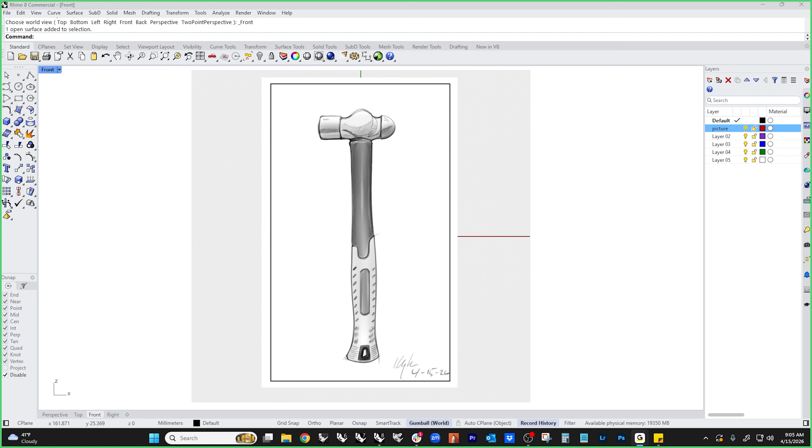So with that out of the way, let's get started. We're going to build this ball peen hammer today. I'm a tool nerd, I like to restore old cars, and have a little workshop here and do all that kind of stuff. This ball peen hammer is one that I have in my collection, and I really like it for some reason. There's just some hammers that feel good in your hand and some don't. I'll use one for a while, and if I don't like it, I'll usually just give it away or donate it to a tool library or something like that. But this one is a keeper, and I've had it in my collection for quite some time.

So the interesting thing about it is the head on this thing has actually a lot going on, and I have it sitting here on my desk. You can't see it, but as I turn this thing around, it's actually got a bunch of different shapes that are kind of pulled together in order to make this thing happen. I thought it was actually kind of an interesting shape to talk about.

So the way that we'll do this, let's go into a little chalk talk here. If we take a peek at this and think about what we're going to do and how we're going to do this, the main shape here...

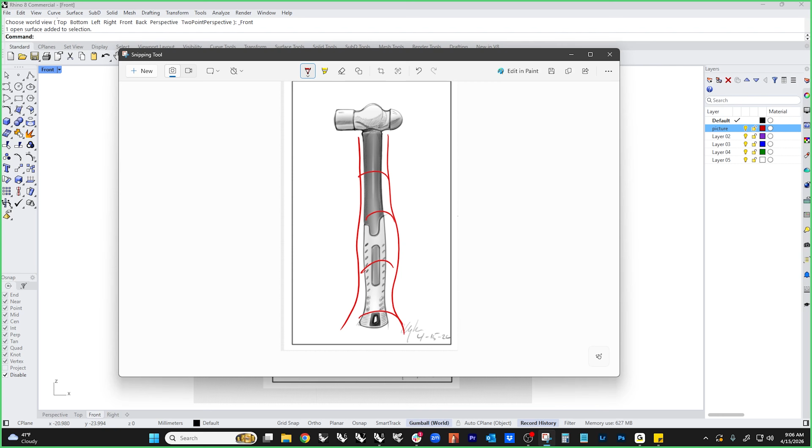...is essentially just a NURBS surface, right? We're going to create some profile curves. We'll talk about proxy objects and how to get things with continuity over the center line. But basically, we're going to make a couple of profile curves, and we're going to get 99% of this just with a couple of curves and a couple of blend surfaces. This up here, that's a primitive object. This back here, that's a revolved object.

This is where the fun begins, and there's a couple of shapes in here. There's one shape that kind of goes like this, and it actually, if we look at this in perspective, kind of goes like this. It's almost kind of like a bladed shape, and it has a section kind of like that. Then there's a secondary section in here, a secondary shape, which is kind of this guy. That kind of lives on top of this thing, slightly offset like this, and has a section kind of like that, right? These two things have to kind of work together and blend together.

And then there's all sorts of little blendy fun that we're going to have in here, and we'll see how that works out. We'll burn that bridge when we get to it, so that's kind of the strategy. This kind of stuff is easy - just projected curves and a little push-pull. All that stuff is kind of easy, so we'll blow through that quickly, but that's in a nutshell, very simply how we're just going to come over here and do this, that, and the other thing. And then done, right?

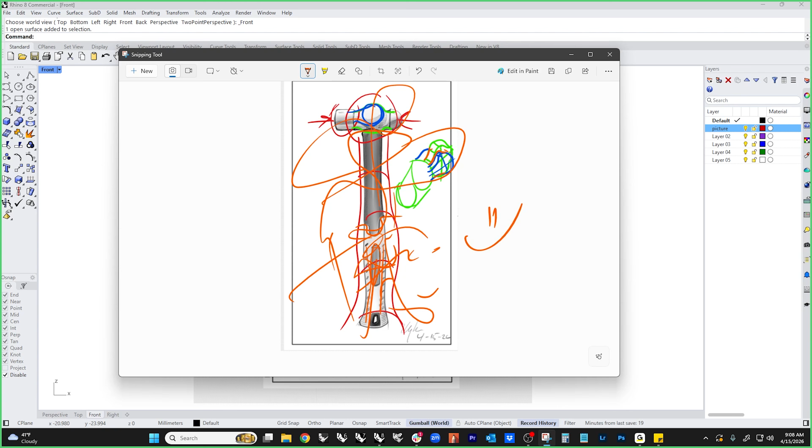So let's go ahead and get started. Anytime I do a video like this, I always start with an image of some sort, and in this case, this is no different. The way that we get that in is we just run the picture command, find our picture, and drag it into the scene, and we can do whatever we want with that. Since I've already got one here and already got it on a layer, I'm going to skip that step.

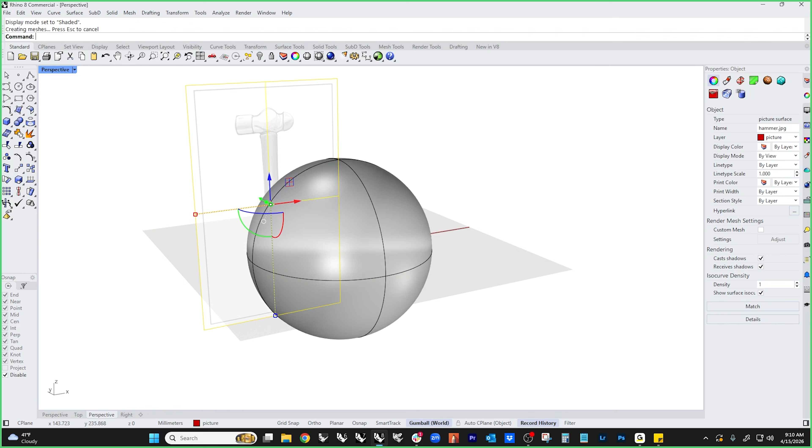In the materials tab here, if I pick this, you'll see that we have a material assigned to this. This is the picture, and you can see that it's a picture type of image right here. We're just going to crank the transparency up a little bit, and that's going to fade that out so that we can work over it. The other thing I want you to notice is I actually have this stuck back in space a little bit. The reason for that is if I were to model something at the center line, which is where we're going to be, and you go into shaded mode, if the image is in there, you can't see it. So I typically stick it back in space so that I can see it as I'm rotating around, but in front view, it's still oriented and all that kind of stuff. All right, that makes sense.

So I'm going to lock this so now it's not selectable, and we'll just jump in and get rolling. The first thing, the easiest get here, is let's just draw some curves. I'm going to come in here and approximate where all that stuff is going to go. Now, I could have machine gunned points down here and gotten this really close, but I don't want to do that.

I want to follow rule of three. If you don't know what rule of three is, there's a video there, and I always talk about it. Rule of three essentially is it only takes 3 points to make a transition, right? If we have 2 points, we can't make a transition because there's no points in the middle. If we insert a control point into the middle here, now we have 3 points. Guess what? Now we can go up or down. In this case, that's a polyline, but if we look at this now, I can make a transition - I can go up or down. And if I want to make an S shape, then I need 1, 2, 3, 4. Now, the interesting thing about this curve, even though it only has 4 points, it still follows rule of three, because 1, 2, 3 - these points make up this transition, and 1, 2, 3 - these points make up this transition.

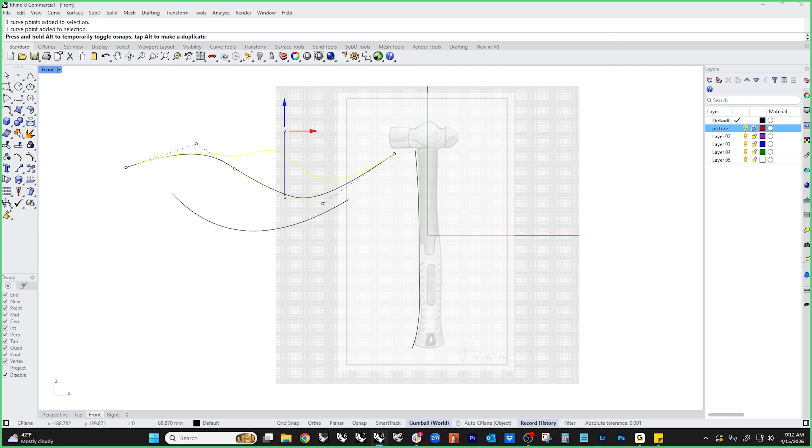This leads into a much longer discussion about continuity, but I want to give you the TLDR. So now I've got 1, 2, 3 that makes up this transition, and I've got 1, 2, 3 that makes up this transition, and those can function independently from each other more or less. Now there's a second set of 1, 2, 3 right here which is shared between these, which is the blend between these two, and this 1, 2, 3 now controls either the blend between the 1, 2, 3 on the left and the 1, 2, 3 on the right, or the transition between the two of those, depending on how they share.

So the concept here is we don't want to do curves like this. I see beginners do this all the time, and you end up with a surface that looks like that. Then you go down the road and say, why are my fillets weird, why is it hard to model, why is it hard to edit, why is everything hard? It doesn't have to be.

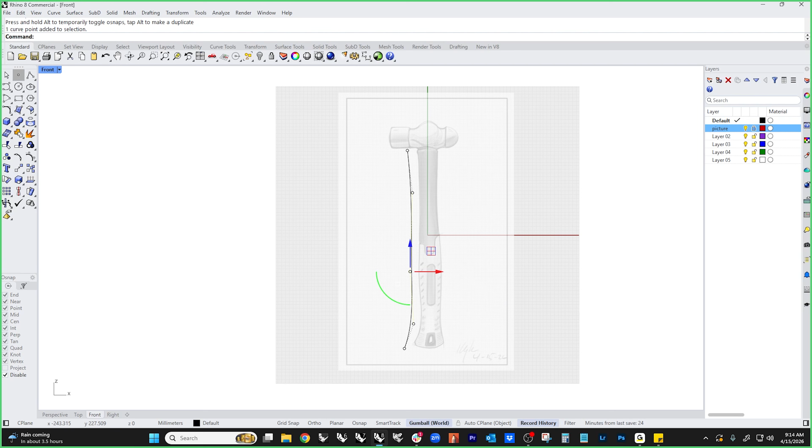If you look at this shape, it's got a high point, a low point, and a high point. 1, 2, 3, boom, right there. Then it transitions from this high point back to a low point, back to a high point, which means I have to have a point at the high point, a point at the low point, and a point at the high point again. 1, 2, 3. Once you understand this, this is the very basic building block of NURBS modeling and sub-D as well, because sub-D follows the same rule.

So if we're going to make a corner, we have an anchor point, 1, 2, 3, anchor point. This is our transition right here. If we want it tighter, we move these closer. If we want it looser, we move these farther apart. This is the exact same rule with sub-D.

If we look at sub-D—I don't think we're going to do any sub-D on this end unless things get really wild—but sub-D follows the exact same rule. If we turn the points on for sub-D, look what we've got: anchor, anchor, 1, 2, 3. If I grab these edges and move them closer, what happens to that corner? If I grab these edges and move them apart, what happens?

Okay, so that's all you need in order to make a shape. And so now you start looking at things differently, and you start saying, okay, where are the transitions? Where are the inflections happening?

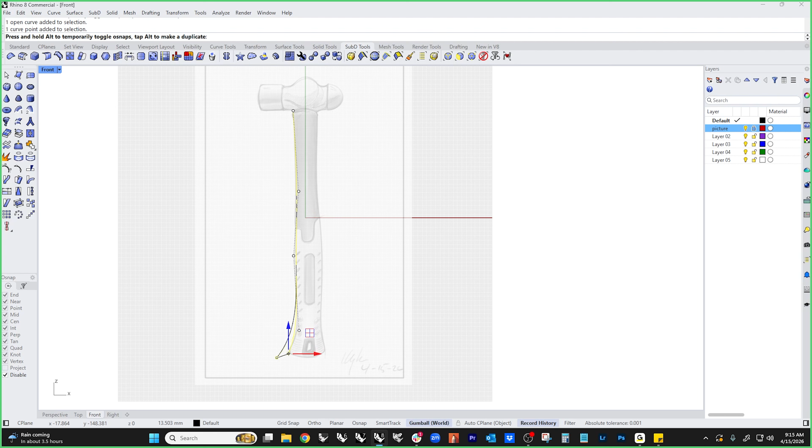In this case, we have a point here. We have a point that's going to land somewhere in there. We have a point that's going to land somewhere up there. We have another one that's going to pull in like that. And then we've got one that's going to land there. That gives us everything we need. Now we might fuss this a little bit, just with our nudge keys—we may pull this out just a hair and do some adjusting—but that is the bones of our curve. We don't need any more than that.

The only time we would need more than this is if there's a sub-transition somewhere in this curve that we missed. By a sub-transition, I mean if we had an out, in, out, but we missed it and there actually is a second transition somewhere down in here, then we would just need to add another control point to get this secondary transition which lives down here. So if this curve changed shape or changed speed on us—there's a million ways to refer to that—if the shape changed so there was a sub-transition somewhere in there, you'd need an extra point in order to get the 1, 2, 3 to make that.

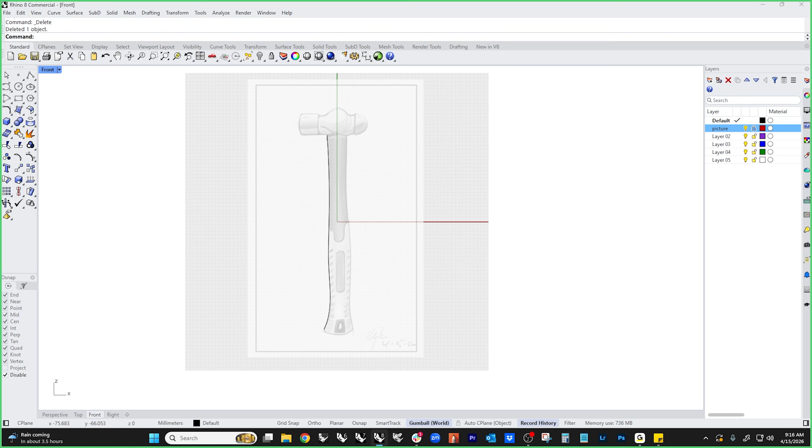Okay, now because we're going to blend over this, I'm going to just take this curve and mirror it.

The reason I'm going to do that is because now all my points match, and this is going to be a lot easier to get a blend that behaves itself the way I want it to. I don't want crazy isoparams crossing each other, or a whole mess of stuff to deal with. So I'm just going to do something like this.

Now for reference, I'm going to just draw a straight line across the bottom of this. I'm going to change degree from 1 to 3, and that's going to give me a degree 3 curve with 4 points, which is super easy to edit. I can just change that to get my shape there. So that's the bones of how we're going to build this handle.

Now we're just going to grab gumball and extrude those back, and you'll see that we get really nice, clean, in this case single span surfaces, which is really nice.

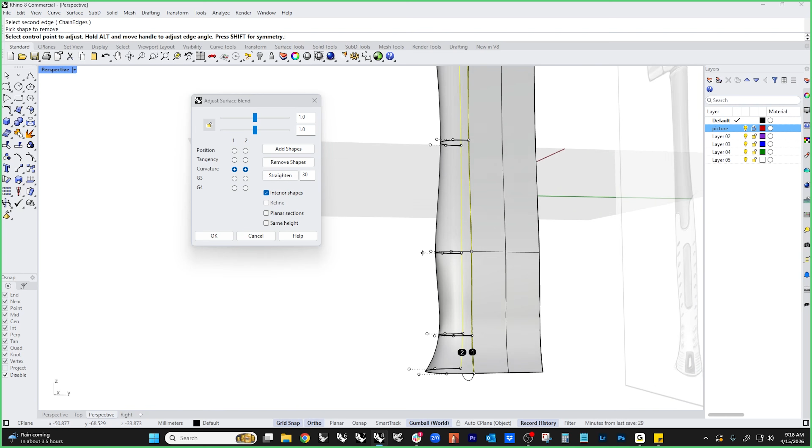So now I go and grab my blend tool, which lives in here, I keep using my pop-up. I'm going to show you where it is. It lives in here. And we're going to blend from here to here.

You can see that we get a really gorgeous transitional surface. We don't even need it to be curvature. We're just going to do that, and say this is going to be the same height. And then we're going to lock these handles and adjust our shape here. Check that out.

Anytime you need to build a shape like this, a grip for anything, a grip for a drill, a grip for a ski pole, any type of handle for anything, this is one of my favorite go-to techniques for being able to do this.

The thing that I like best about it is it's super easy to control your shape. You know it's going to be tangent across the center line, so you're not going to have any fins or butts at the center line.

And the surfaces that you end up with, we can delete these now, are wonderful, right? That is a really nice shape.

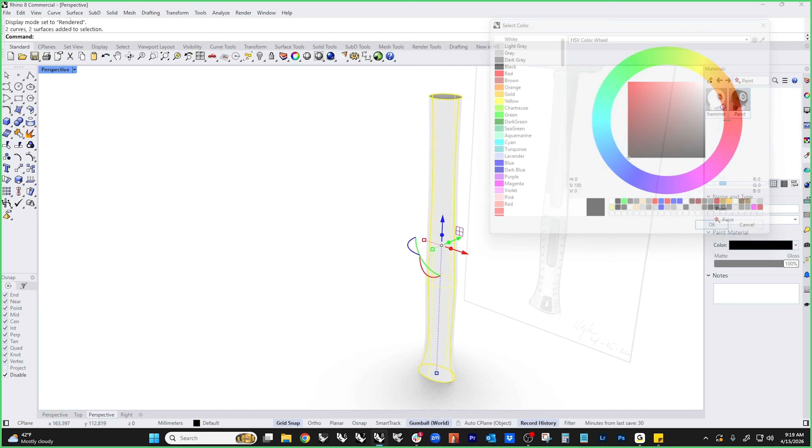And if we change that to rendered mode and throw a material on this, so you can see what it looks like. You can see that we get really nice geometry there.

Okay, so that's the heavy lifting for most of our handle. There is a secondary thing that's going on down here because of the way that this is shaped.

We can actually probably get that shape a couple of different ways, and I was going to see if we could cheat and pull the points, but I don't want to increase the density of that.

So let's do a loft, and we're going to loft from here to here to here, and let's let that do that, and see if a couple of our options get us something a little nicer.

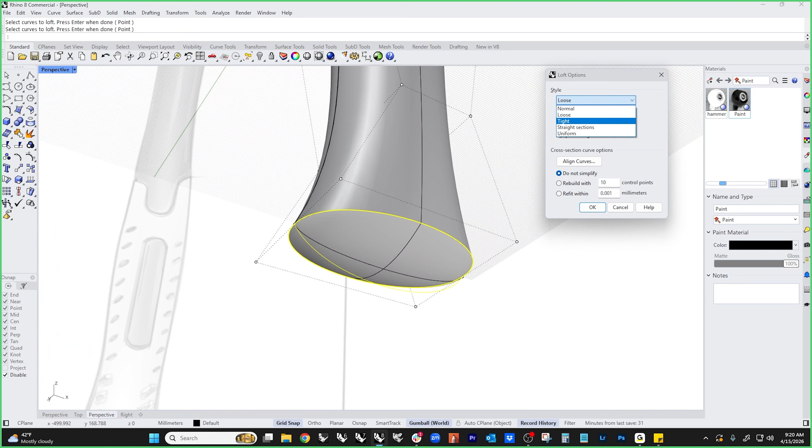Something like that, but I don't like this shape side to side. But I'm going to say okay, because this is going to give me what I need to get there.

And in this case, all I need to do is grab these points here and this point here, and scale these together a little bit, and look what happens. See how that changes shape? And that gives me a really nice cap over the end of that thing.

Now, the one that I have here, I think this is a product of a bad drawing instead of actually the shape of the bottom of this hammer, because the one that I'm looking at on my desk is actually fairly flat. So I'm actually going to cheat. I'm going to scale this up just a little bit and flatten that out.

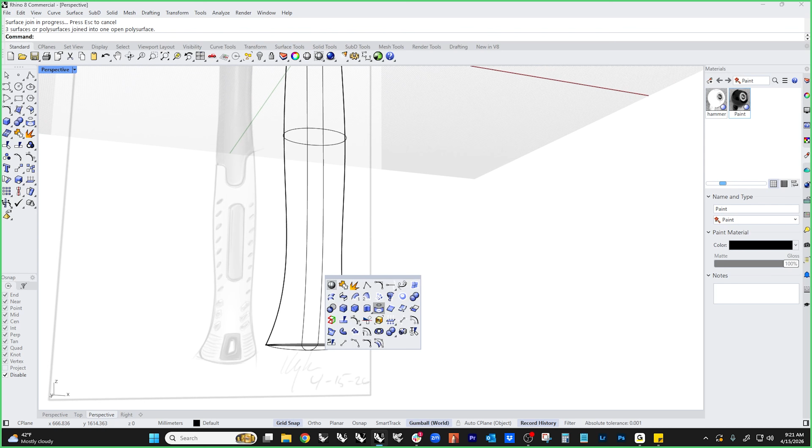I think I'm going to let the model dictate reality instead of making the model follow the drawing. It's always important to reality check yourself and make sure your stuff always makes sense. So that's closed up at the bottom now, and then we can add a fillet or a blend on that, but I don't want to get ahead of myself at this point.

Now up here, we've got a little bit different shape. This thing has an oval shaped recess, a part that sticks up. The hammerhead kind of sits down on this on a flat. Actually, it's kind of tapered.

I think I'm going to cap this, and then do some gumball tricks with Control-Shift-Select. I'll extrude up another little puck here, then Shift-Drag-Scale to bring it in, and bring it down just a little bit. Got grid snap on it, I don't want that, to give me a little thing like that. Then I'll extrude this up again, and we get this transition for free here, so I can blend and get that.

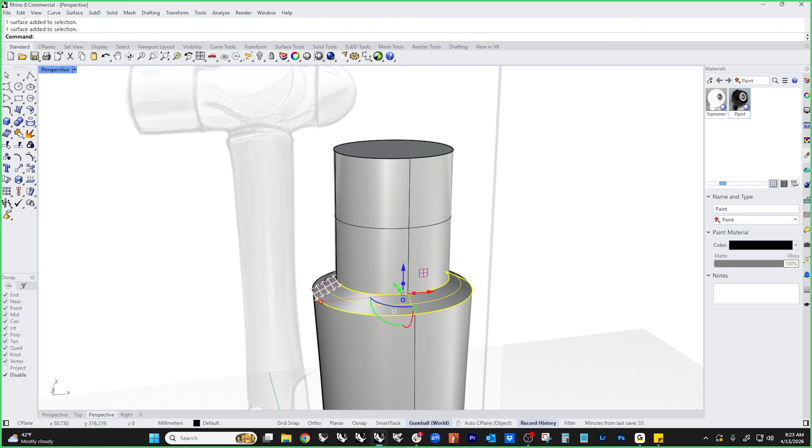Or I can delete this and use a blend surface to get a little blend, which is actually one of my favorite tricks, so let's do that. Let's delete that, move this up a little farther - can always change it later - and then run BlendSrf and chain it. That gives us blends on either side.

Now this one is actually fairly sharp, so I'm going to sharpen it by moving that closer to 0. You can override this, by the way - the dialog box stops at 0.25, but you can actually override that and make it sharper. It still has a little teeny transition on there, but less than before. Let's take this one and push it down like that. That's a lot easier than using blend surfaces and all that kind of stuff.

Can we dimension the set, since I say I want the handle to be 300 millimeters, for example?

I'm glad you mentioned that - I actually did scale this to be somewhere in the 300 millimeter range. So when you scale the drawing, typically I'll make a 300 millimeter line, and then scale the drawing somewhere in there to match that. I get flamed all the time for not measuring my drawing, so I actually measured this one. I've done entire demos where I finish and then find out the thing is like 17 feet tall or an inch and a half long. When it's just a demo that's never going to get made, I don't worry about that, but in this case I actually did.

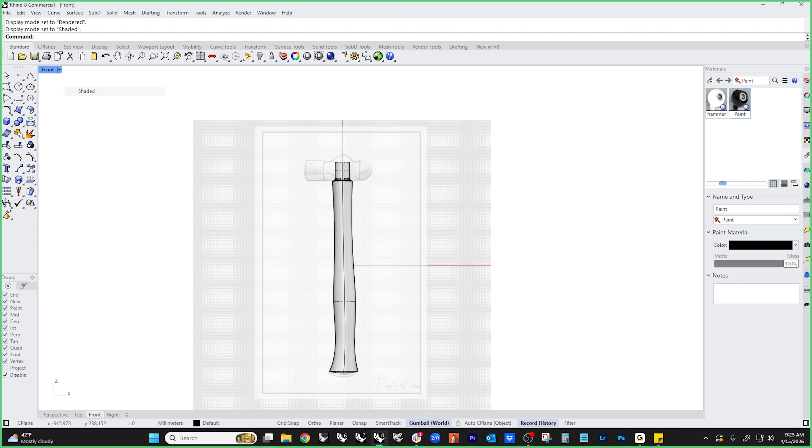So let's take a look at wireframe, and then go ahead and finish up our details here and get our handle done. I'm procrastinating getting to the hammer because I know how to do this stuff, and I haven't quite figured out how to do the head yet.

So let's follow our 1, 2, 3 rules. In this case, we're probably going to do this. And that gives us our structure, and now we just need to adjust our shapes a little bit. Once you start following that 1, 2, 3 rule, all of your curve creation woes are going to start fading away, because the stuff is just going to make sense to you as far as what your shapes are doing and what you want them to do. You won't end up with these crazy inflections in your surface that you don't know where they came from, because you'll be able to see exactly where they came from.

If I had 6 points in here, the surface is going to go all over the place, right? You don't want that. In this case, I know where this corner is coming from, so if I need to adjust it and make it softer or sharper, I know which points make that shape up. I think I want this to come over a little bit more, like that.

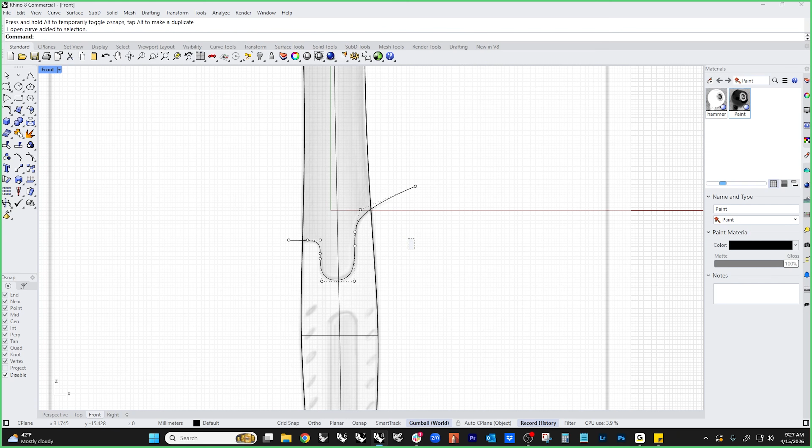There's a couple of ways we can do shapes like this, and let's give this a shot. So let's copy paste this, and turn the points on for this one, and point edit our offset in. Now you may be asking, why didn't I just use offset?

Well, because offset can actually - let's use offset and I'll show you about that. If we go into offset and I were to offset this thing 2 millimeters, or actually let's do 1 millimeter like that, and I don't want to cap it... let's do something like that.

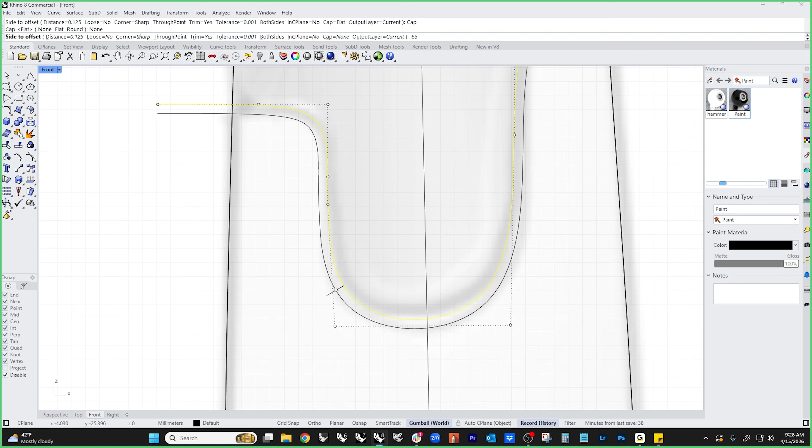That probably works. And I look at this curve. Bleh, that's exactly the opposite of what I want, right?

So let's run offset again, but let's use the loose option. What that does is it takes the points and moves them normal to the old curve. Now, this is less accurate than the typical offset, but it's a lot nicer from a curve point of view, so I actually like that personally.

So let's project this through, and we can hide this. And now we've got the shape.

Now, if the world is kind, we can use push-pull, and we can push-pull this in a little bit. Now, in version 8, I would have been able to get both sides of this, and that worked out all right. But in version 9, I'll be able to select both sides of that and just push that in. But that actually worked out quite well. And we can put a little fillet on that if we want to later, but I'm not going to worry too much about it right this minute.

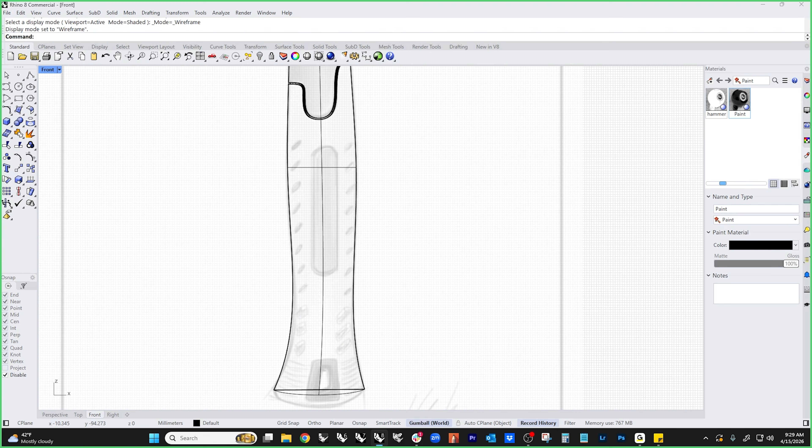All right, so let's look at the rest of our details in here. And we'll do, let's see, do we want rounded rectangles or do we want ellipses? What does this thing look like? Looks like ellipses, we'll go with that.

I'm going to use a 2-point ellipse and just go like that and like that. And then I will, let's draw a curve, like that, vaguely resembling our other curve.

And then we'll array this down the curve. So we'll do a transform, array, along curve. That's the object, that's the curve. We want, how many do we want? 1, 2, 3, 4, 5, 6, 7, 8, 9 of those.

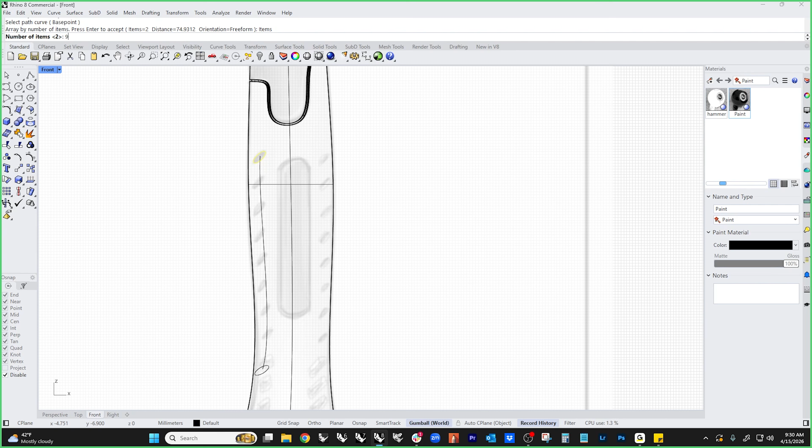Something like that, and that's obviously more precise than our original drawing was. So I'm going to take it and I'm going to cheat this one just over a hair, like that. Let's mirror this and see how close we get. It's just easier than drawing it again.

Shapes aren't exactly right, but let's see what we can do. Just rotate this a little bit. I think I'm going to call that good enough for demo work.

And then our rounded rectangle in the center. And I'm going to take this and I'm going to move it between these two items. Let's see, let's pick one, so we'll move it between these two.

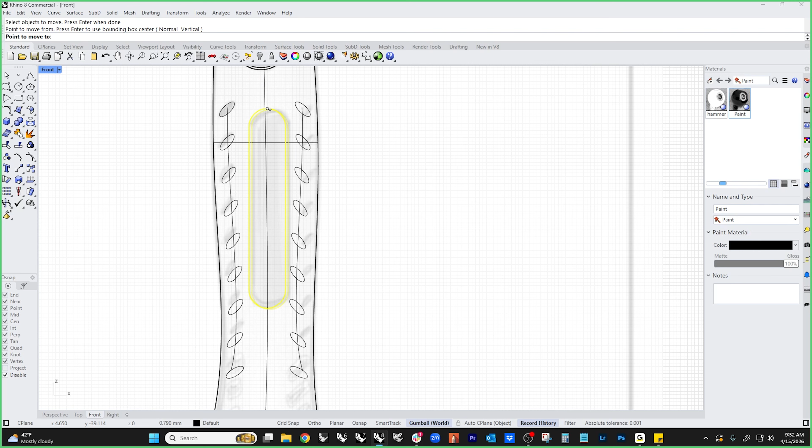So if we say move, that's our object to move, and then we're going to do that. And the point to move from is going to be the center of this guy. So there, and then we're going to use the B switch, so we're going to hit B enter, which says we're going to move between here and here. And so I know that this is dead centered.

And so now I just need to move it down a little bit. And in this case, there is an offset in here, so I'm going to copy paste. And I'm going to just shift scale this in a little bit. Or I could use offset with the loose. Let's do that. That worked all right, so let's do that.

Offset. Could you mirror the ellipses? Could you mirror and the ellipses would be inverted directly?

Yes, if my shapes were exactly, if the left side of the hammer and the right side of the hammer were identical, but they're not. So when I mirrored it, they didn't quite match up. So we're using the loose option, and we're just going to pump that in, and then we can just double check and make sure that our curves aren't crazy.

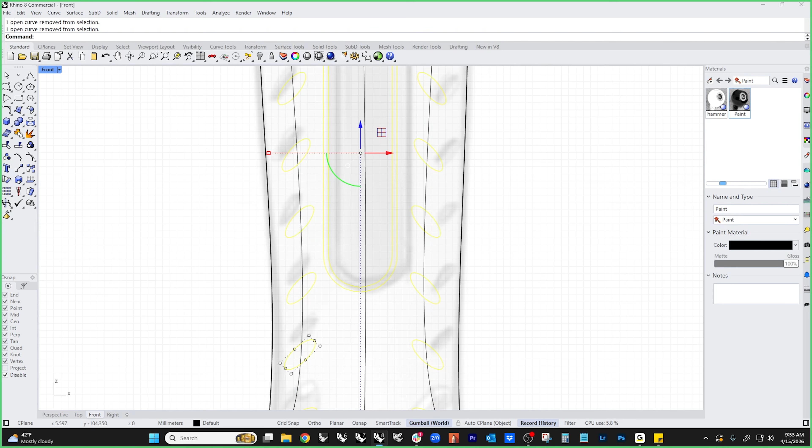So this, I'm going to take these all, not these, and I'm going to project those on. And then we can use push-pull, drop that in.

Now, the nice thing about push-pull, if I just pull this in and I don't click again and just hit enter, it's going to know it's going to go in, but it's going to remember the distance from the last one. So this one and this one now match.

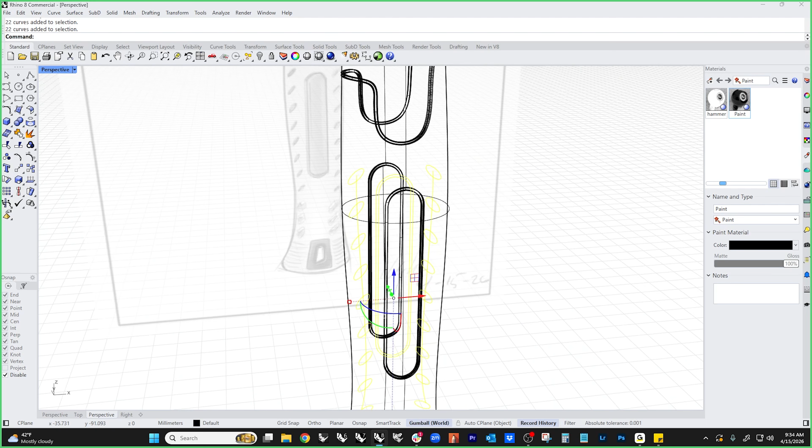And then for these guys, these are actually through holes. And so I think what I'm going to do actually is I'm going to retool my thought here and get rid of these, keep these. And instead of using push-pull for those, let's grab all of those. Those, not those.

Let's just use gumball cut, I like this one. So what we can do is grab this, use the little slash here, and it should just rip right through there.

If you didn't know what all those other little buttons on the gumball do, there's some cool stuff in there. So let's take a look at what we've got. This is actually starting to look really good.

And if we want to procrastinate further, we can dig into this handle a little bit and do the blending. Where are we? 935. Okay, I think that gives me enough time to procrastinate.

I saw a really funny quote about procrastination the other day. It said, 'I'm not procrastinating, I'm just waiting for panic to focus my efforts.' I thought, wow, I feel seen.

All right, so let's blend this. And how did you do the holes? Yes, let's talk about that again.

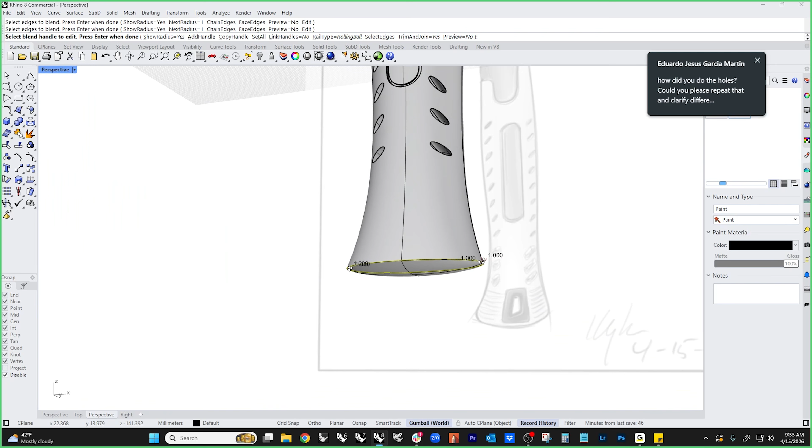So let's undo that. We've got an object, we've got curves. We want these curves to make holes in this object. We're going to grab this little slash on gumball. This is a cut. If you hover over it, there's a little cheat sheet that pops up. Click and hold, drag it through the model, or hold down shift and it'll go both directions, then let go, and it does a wire cut right through the part.

Cool? All right, let's do some blending down here.

Now, filleting is one of the things in Rhino that is much maligned, and it earns some of that, some of it doesn't, and I'm going to show you some tricks to get around it. One of the first things you can see right here is this is going to fail because the fillets are red. So if I run this, that means there's something going on right in here that is going to make that fail.

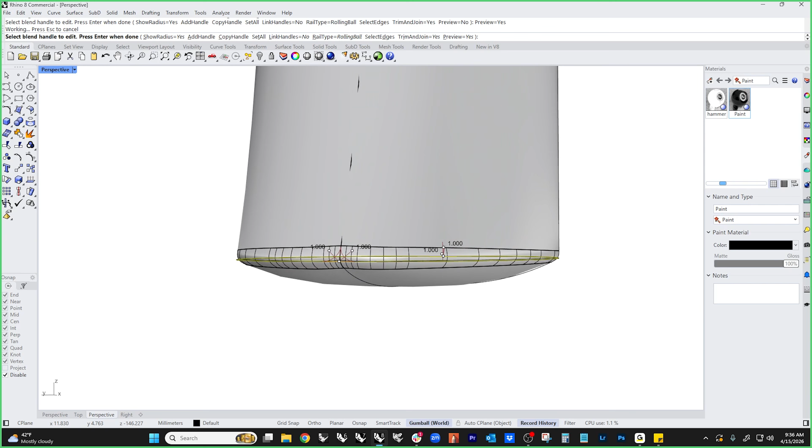And if we preview it, you can see what happens. It chokes right around the center line. So let's not even worry about that.

Let's do this. I'm going to extract that surface, and I'm going to draw a box, and I use a box just because I'm lazy. Keeps me from having to draw two lines. And let's just trim a hole here.

And you can see maybe where our problem lies. Our problem lies right in this area right here. See how that's misbehaving? Let's figure out what's going on there.

So let's undo that. And we might be able to get away with having our fillet behave if we fix what's going on here. So let's look at the points and figure out what's going on. Now, what's going on is you can see exactly what's going on here.

See how the points are doing this right here? So this surface is a little bit kind of undefined for probably what it needs to be. And so maybe if we change degree on this from 3 to 4, we can get a little clearer picture of what's going on.

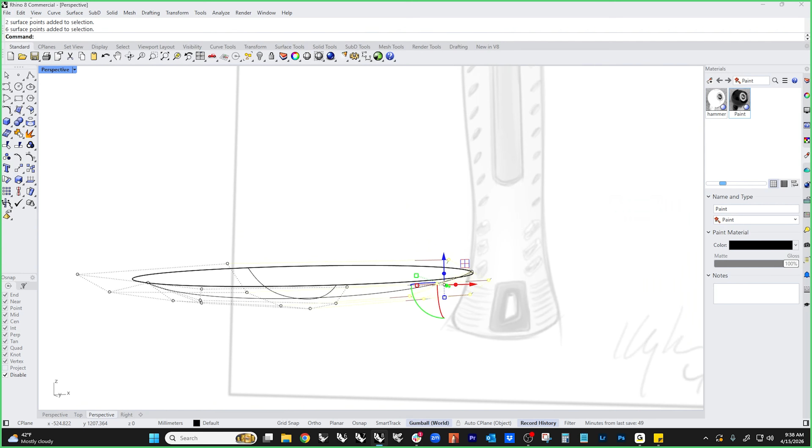And it might be as simple as if we take this row and scale it flat like that. So we've got tangency there, and then we take this row, double click the control. I'm moving the gumball to where I want it to scale to, and then scaling that to 0, and that will smash that flat. Now I've got a tangency situation going on the end of that, and it gets rid of that little discontinuity that was happening there.

Let's see if that makes any difference when we run a blend around here. It may not, let's see. So it actually does a much nicer blend around there.

But I think I want to take this one step further. I mean, we can run it and let's see what it did. It actually did an okay job.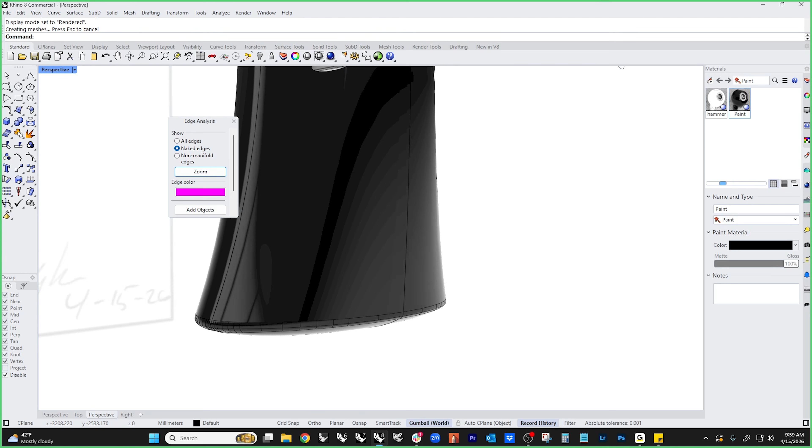Maybe we call that done. I'm going to call that done. If you want to dig into this further and you wanted a more complicated blend, it's just a matter of modeling a gap.

Can we get an explanation on Grasshopper? Not from me. You're gonna need somebody a lot smarter than me, like Jaffe or Brian James or Steve Fuchs. I'm not a Grasshopper guy.

So if you wanted to dig into this deeper, you can look at the structure of this and say there is a surface there, there is an edge there, there is an edge there. If I wanted this fillet to do something differently than it's doing, all I would have to do is change the shape of these edges in a way that makes my shape do what I want it to do.

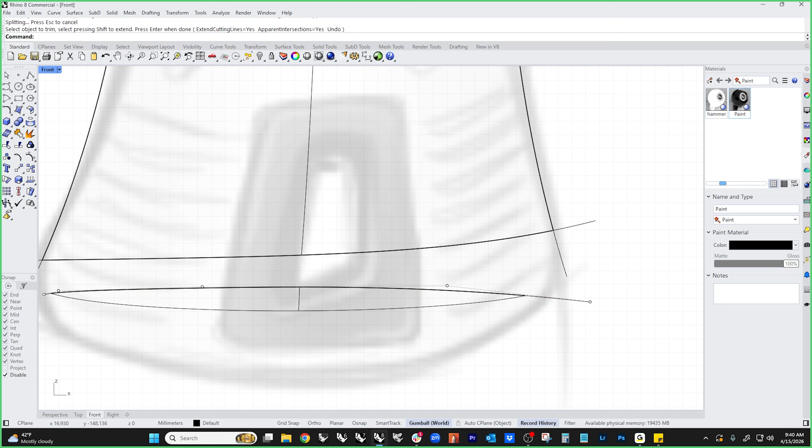Now, I've got two parts of the structure I had before. I just am missing the middle part. Well, the easiest way to put the middle part back in is just to grab blend surf. Let's do chain.

Now we've got control of this, how the tangency goes together. I can even change the shape internally on that. I can go to curvature, not for product design—some people get bent about that, but tangency, for my money, is about as far as product design is ever going to go. So now we've got a different shape going on there. Could you have gotten that with fillet? Maybe, if you'd add handles or something like that, that's fine. But I like being able to define that stuff myself.

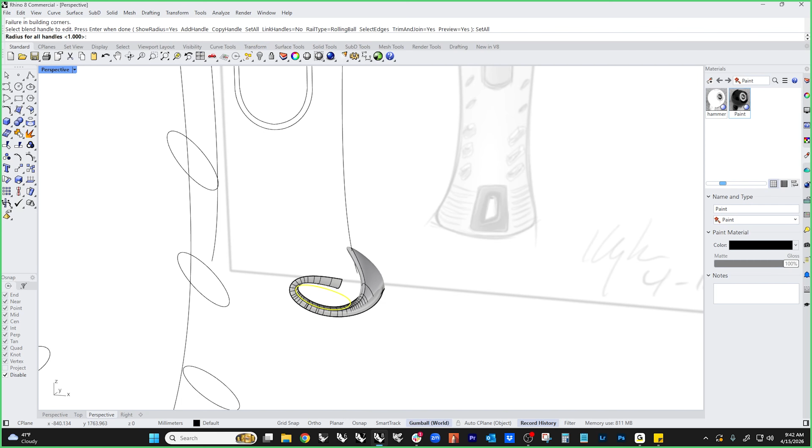So let's go in and do some itty bitty teeny tiny little fillets in here, and we're going to set all of these to like 0.25. Looks like that's still self-intersecting, so let's make it even smaller. That looks like it's getting close. That looks like it's completing without any drama, so let's call that good. And then we'll do the rest of these as well. I like to test it on one to make sure it's going to do what I want, and then roll it out for the rest of the crew.

Otherwise, you get to wait while it calculates all of them and then find out it failed, and then you change it. It has to calculate for all of them again, and then you find out it failed—it's annoying. So these little fillets are the things in product design that kind of make or break the model when you're doing renderings. And there is an edge softening tool you can use if you don't want to model all of this stuff just in the render mesh. If you hit F1 and search the help for edge softening in Rhino, there's a whole thing on how to use that.

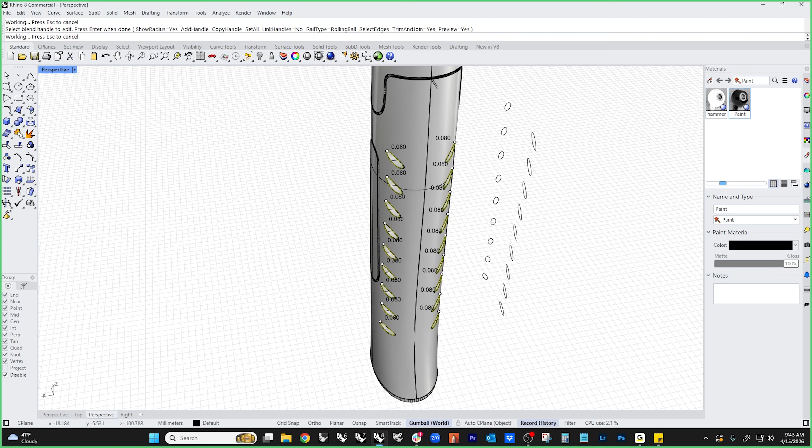And we still got a closed poly surface. It's a good idea to keep an eye on that, to make sure that as you do this stuff you're not interjecting some kind of wonk into your model.

That's not super awesome right there, but I'm going to let it roll. There's a little peak right there that's not cool, but it's probably a product of the offset. If I was going to do this, I'd probably print it, take a look and see what it looked like, but if it was going to be too disruptive, I would go in and fix that.

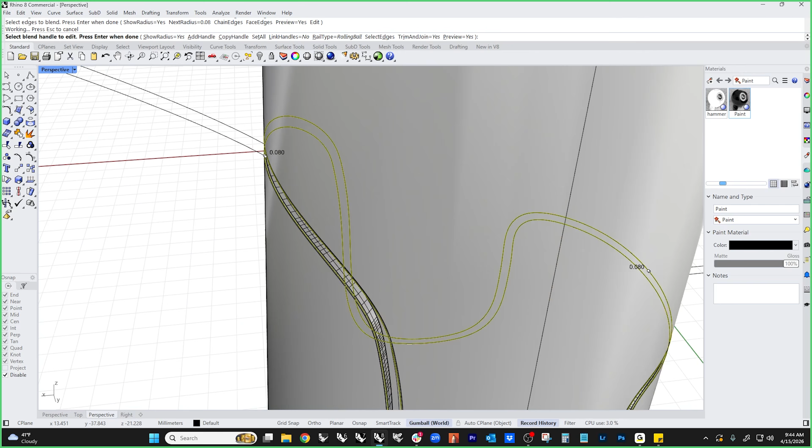That 0.08 fillet seems to kind of do what I want it to do, so we just want to crack those edges off. All right, and I think that gives us our completed handle.

So let's make a new material, and we'll make that kind of a gray. And we'll do this part gray.

And yeah, all the rest of the stuff looks right. Let's change the properties on this a little bit—let's make this a little matte, and let's make that a little less clear. Actually, let's change this paint to a plastic.

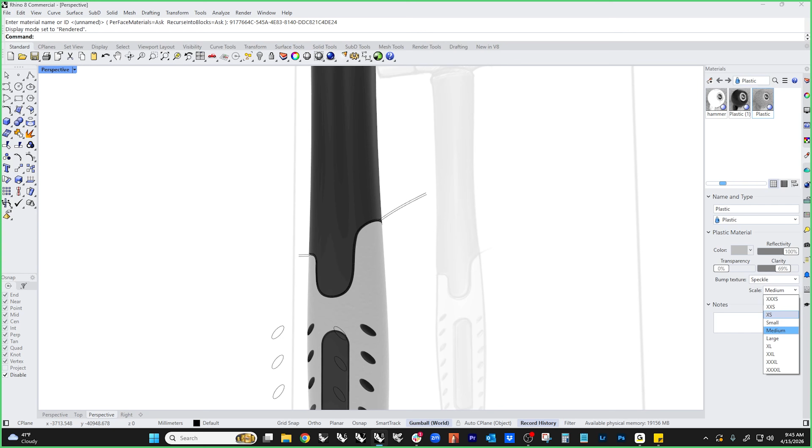And that way, the nice thing about the plastics is they even have a bump texture in here. So if we wanted to put a texture on that—let's see, didn't want it on that one, wanted it on this one. So now that's got a little bit of a texture to it.

And fun fact, if you take this and change it from a plastic to a physically based material, and look in the bump channel, you can see the default value for the speckle texture is 50%. If you raise that, you get more specklies. But you have to switch it to physically based in order to get that setting. All right, let's save and call that good.

This is my redemption song, so we're going to call it Hammer Doesn't Suck Yet.

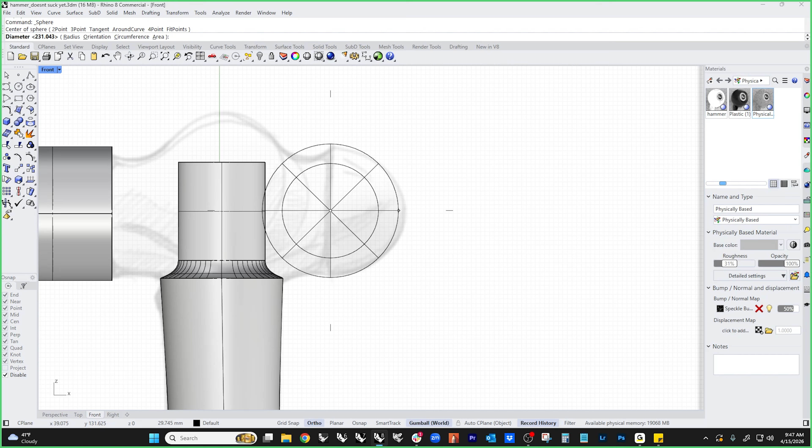Let's dig into the head of this thing. So we've got two very easy to model shapes. Let's grab the easiest one, which is this, and we're just going to make this like that—direction constraint is none, so we're going to pull it in that direction and go there. Let's shade it so we can see what's going on. And then this guy, I'm going to call this a half a sphere, so let's just do that. And it's actually slightly oblong, and there's a seam here that I don't want to be part of my model, so I'm going to rotate this 180.

Because what I want to do is actually trim this just past the center line. And then what that does is that gives me a surface that is now seam free, and I don't have to worry about what to do with it.

So let's get into the shapes on this. So we have a shape that starts like this, 2, 3, comes over here, 2, 3, like that. And we just have to make these points work a little harder. It's always better to pull the points farther and make the points work harder than it is to add more points.

Ideally, we want these guys to do as much lifting as they possibly can without adding additional complexity. Now, I've got a curve already, and that looks great. I'm going to just mirror this because I'm lazy. And it gives me most of the stuff I want already. I just need to change its frequency a little bit with scale. And that gives me pretty much what I'm looking for.

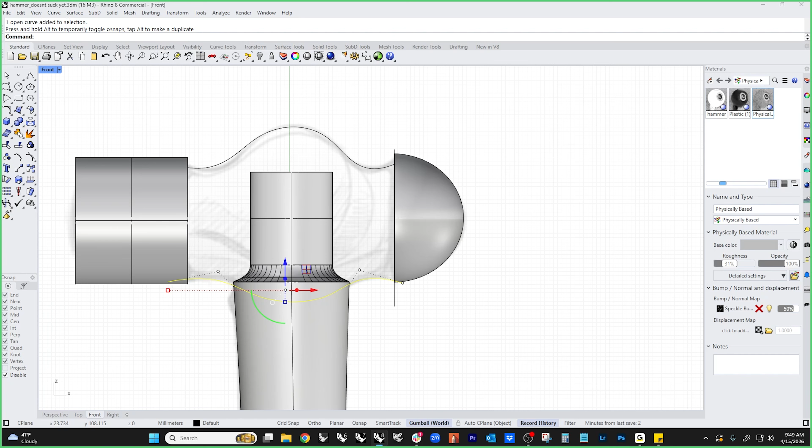So the efficiencies here, we want to work as smart as we can. And anytime that you have a situation where your points are matching from here to here, it's going to make it easier to surface stuff because we can just do things like this. It's simple, really.

Now, the cool thing about this is we've got a nice point structure so that when we want to start changing the shape on this a little bit, if we pull this out like this, the center of this thing actually has an inflection in it that allows this to bend around like that.

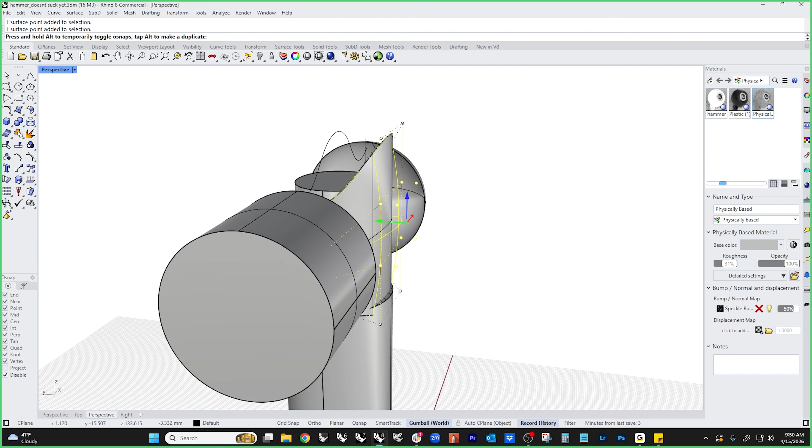And that gives me the understanding and the control to be able to manipulate this surface to do what I want. So I can look at the shapes, I can look at the highlights, I can read what this thing's doing, I understand what's happening, and it all becomes much less mysterious, and you're much less a victim of

Rhino doing whatever it wants and you not having any say in the matter, right? We want to be able to have control over this stuff. That's the key. You want to be the driver, not the passenger of your models.

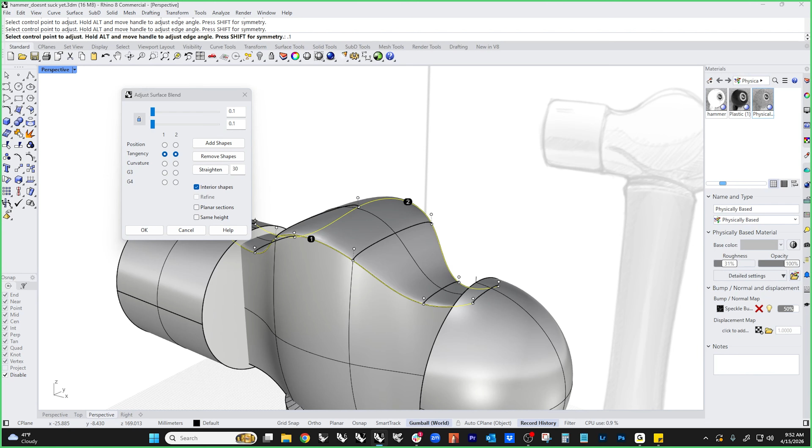All right, so to close this guy up, I'm going to use my favorite trick, which is just blend surf, and I'm going to override this and go 0.1, 0.1, and it makes a lovely little crowned surface with slightly rounded edges, which is what I want.

So let's do the same thing down here. I had somebody joke once that my tutorials weren't so much modeling demos as they were blend surface demos. And I was like, well, I'm not even mad about that because you're not wrong. Because blend surface really is a brilliant tool for doing any of your modeling transitions.

So we've got this main shape here, and that's pretty great. So if we look at this in rendered mode, you can see that we end up with, let's get a metal on this. You can see that we end up with a really nice kind of rounded edge there with almost no work, right?

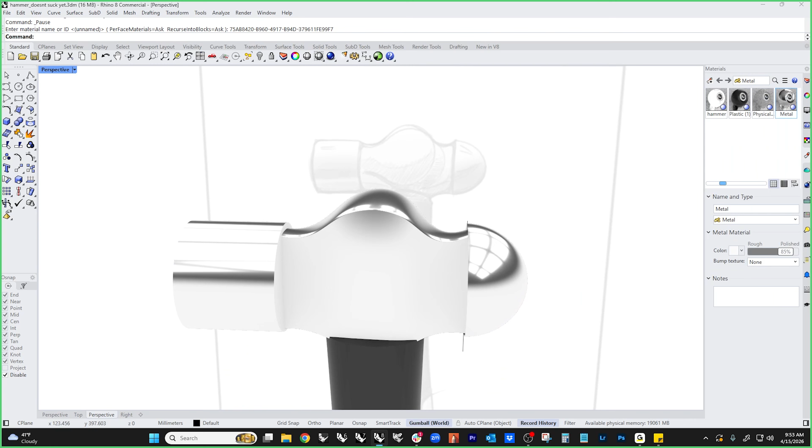We love that. We love great results with little work, right? I think Bill Gates is credited with that whole idea of give a lazy man a job and they'll figure out the simplest way to do it. He's not wrong.

So let's add this secondary shape in here. And the secondary shape, it's interesting. I was looking at this thing, and the secondary shape really, it's not precise. It's not precisely aligned. It's actually kind of weirdly aligned, and the shapes don't really match. And I'm going to split this by point here and here.

And then I'm going to turn my points on. I'm going to change the degree on this because it's a degree 2, and I'm going to make it a degree 3.

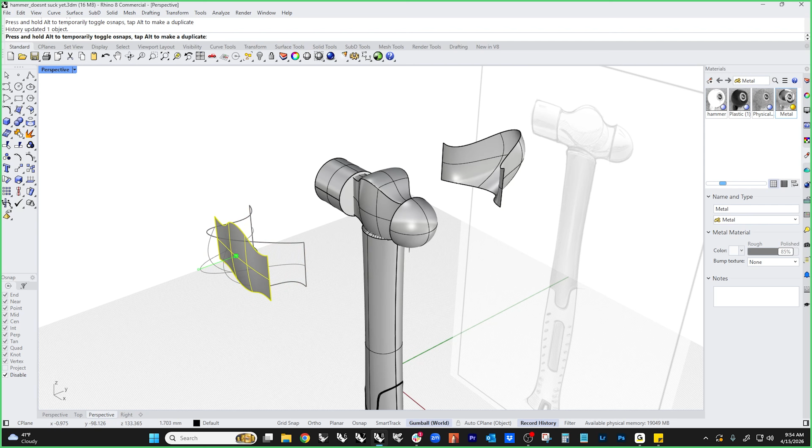So now after mirroring, an edit on the original surface is automatically transferred, yes, if you do it with history. So if you mirror something, if I take this surface and mirror it with history on, and I do something to it, that one will update. And the cool thing about this is... I think that killed history. So let's do this again.

I don't want to do it that far. Let's mirror it like that. So we've got history here, right? Because we had history recording down here. If I take blend, and blend from the original object to the mirrored object, like this, check this out - it all updates.

So I can take that one step further and do this. And as long as I go into the original part and don't mess with anything else in the history chain, because this is the parent, right? So if everything has to come from the parent, check that out - it redoes the tangency.

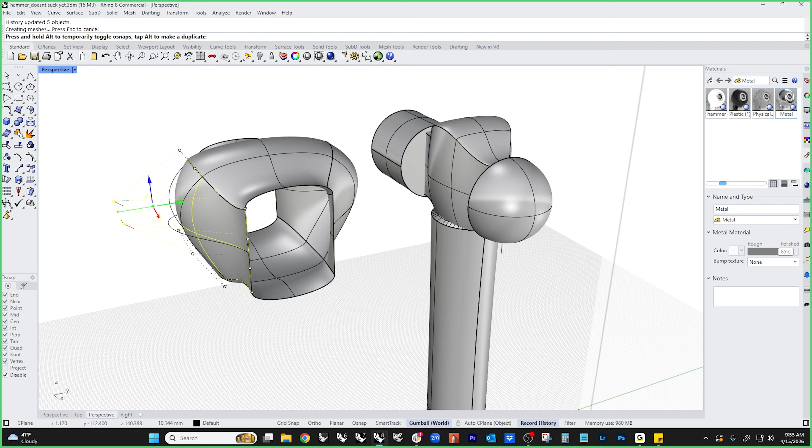Fun stuff. Now, fun fact, blend surf - check this out. If I run blend surf again, there's an edit option in the command line. Select blend to adjust, the two that can be adjusted are highlighted. If I click this one, check out, I can go in and modify the properties of that.

I can even change from tangency to curvature and say okay, run that again. I can do the bottom one now. Go back to the original parent, readjust that, and it all adjusts again.

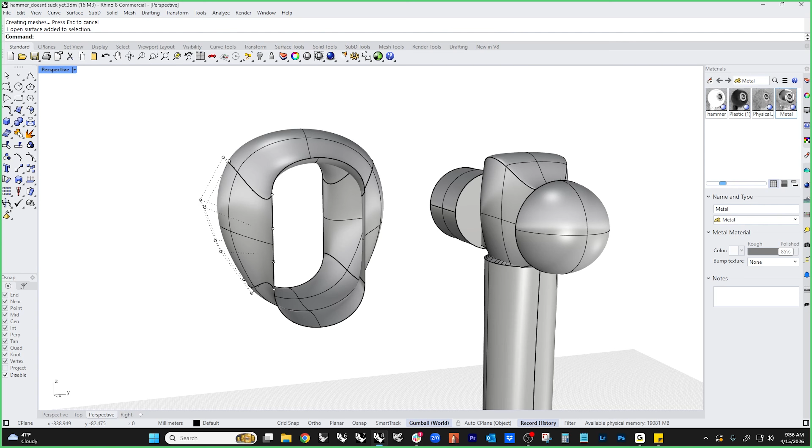So as long as you keep track of who the parent is - and ideally, I've been campaigning for years to have the parent have a different color, but who am I, what do I know about Rhino? Ran a consultancy for 20 years, making a living running Rhino 15 hours a day. As long as you keep track of the parent, you can set up these kind of more interesting history chains and do some cool stuff with it.

Okay, so let's go back to this. We changed degree on this, so we've got more points. So I'm just going to edit these guys here like this, and then I'm going to edit these guys, and then pull these guys a little bit.

And it's funny because I was looking at this shape and I was like, wow, this is a really inelegant shape, it really doesn't relate to anything else. As a designer, I look at it and think these curves need to get finessed. But it's entirely possible that in the world of hammer technology there's a reason why this stuff is set up this way, like to keep the head from shattering when you smash it into something, or to change the resonance, or whatever. Who am I to question it?

So we'll just go with something like this. I'm an art school nerd, I didn't go to engineering school, so I have to take a lot of what people tell me for granted.

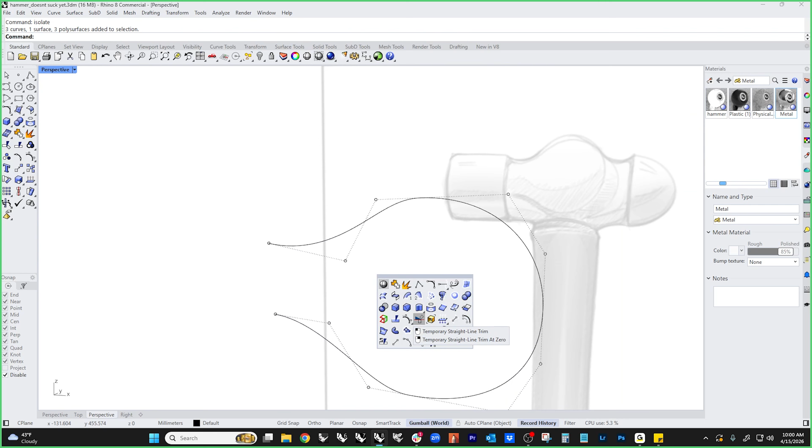So, looks like this guy needs to get tucked a little bit. And so now we've got to figure out how to make a surface out of this, because it's no longer planar, right? It's got all sorts of crazy stuff going on. So let's do something simple, and let's just split this in half. We're going to split it by point, and then we will loft from one side to the other, like that.

Now let's look at the points on this and make sure nothing crazy happened. And it looks like that actually did do some stuff that we don't love right at this edge right here.

So let's do a rebuild on this. It's 4 and 9, so let's just use that, because we don't want to add complexity to it. But let's change it to 3 and 3. And then say okay, and that gives us a better shape.

Now you can see what's going on here though. This shape changed quite a bit, so we might not want that. And in this case we have to decide what's going on with this edge. Is this something that we can live with?

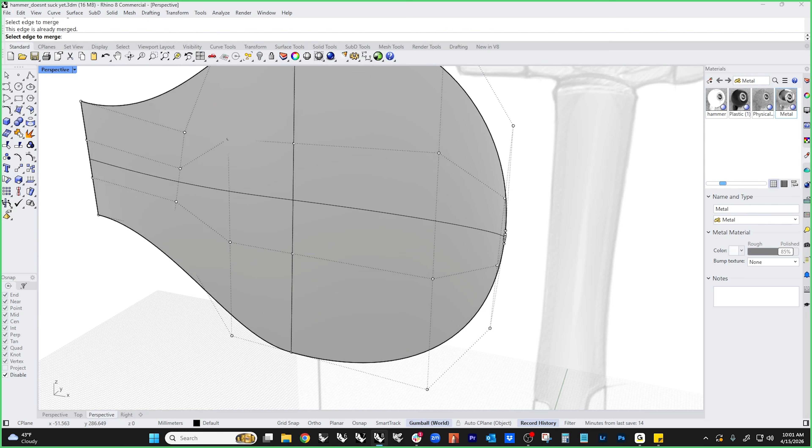Now I'm going to say yes, because chances are we're going to put a fillet on this, which means this edge is actually going to get cut off, and we're going to have an edge that's interior in here that's actually going to do more of what we want it to do. So let's say okay with that.

Now because I want to keep the point structure on this organized in a way that I can keep track of, so I don't want to add a ton of complexity to this surface, but let's add some crown to this.

And then let's pull these points out a little bit so that is shaping the way we want it to shape.

And maybe we even rotate this just a hair like that. And everything still looks like it's kind of tucked where it needs to be. So let's mirror this.

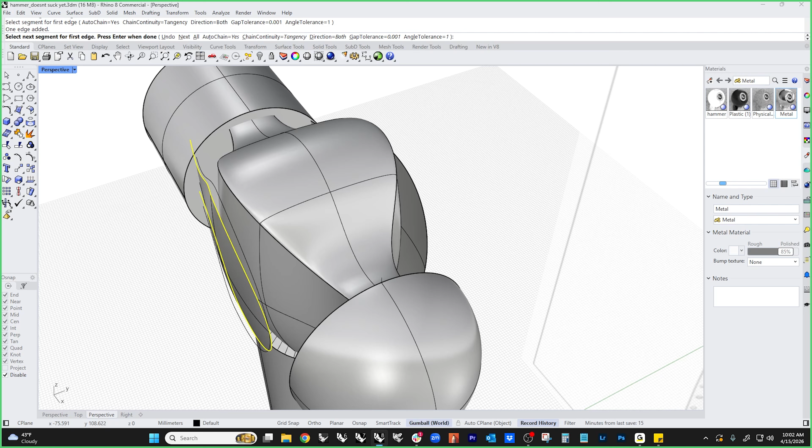And then I'm going to just use the same trick I did before, which is to do a blend surf. And we're going to set this to tangency, and let that roll. Now, mess going on here.

Don't love that. So let's cancel that and let's do something different. Let's loft from here to here. And then let's loft from here to here. That's a little cleaner version of what we had.

So let's go ahead and join this up. And the one thing that I know is going to happen is this edge is a little messy, but if I break that edge with a blend curve or with the surface blend, it looks like that's

not going to accept that because of that edge. So if I say select edges to blend, see how it's not giving me that? It's a closed edge, so what's going on? Why won't that behave? Who cares? I could spend time figuring it out, but I'm not getting paid for that.

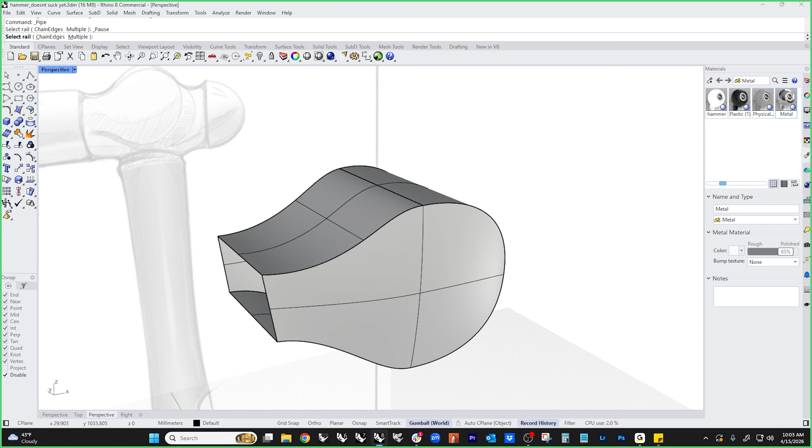So let's do my next favorite trick, which is called a pipe trim. Let's just run a pipe around this thing, and use this to trim a gap. In this case, we need to actually extend these just a hair.

Delete that. Explode this because it's a poly surface, and then we'll just extend this edge a little bit. Like that. This guy doesn't want to extend because it's probably a trimmed surface, so let's untrim it. Now we should be able to extend it.

The only reason a surface won't extend is because it's trimmed. So if you go to extend a surface and it doesn't extend, it's because it's a trimmed surface, so you have to untrim it. So now I have a gap. Now I'm just going to throw a blend surface on there.

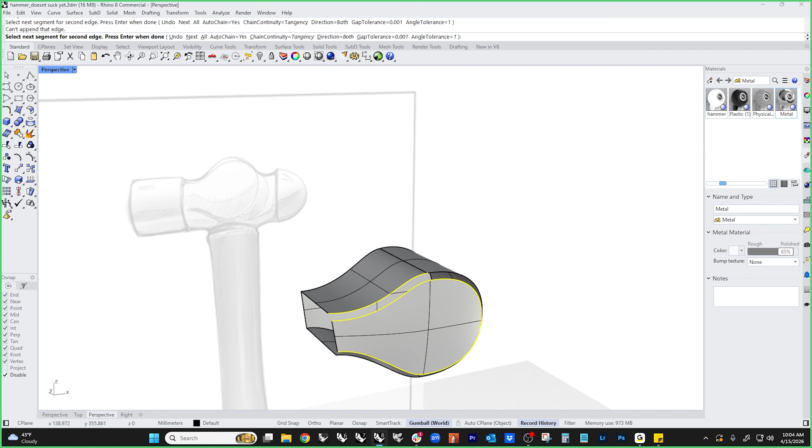Because the last thing we're going to do is let Rhino tell us what we can or can't do. The second you let the robots get cocky with you, it's all over. Okay, so I'm going to call this good.

And I'm just going to trim this in half, because I already did one side, I'm not going to do both sides. So let's mirror this. Join, bring it back, take a look at what we've got.

So we've got a couple of things going on here. This probably needs to get capped. This is already capped. I think I probably want to add my blends to this first.

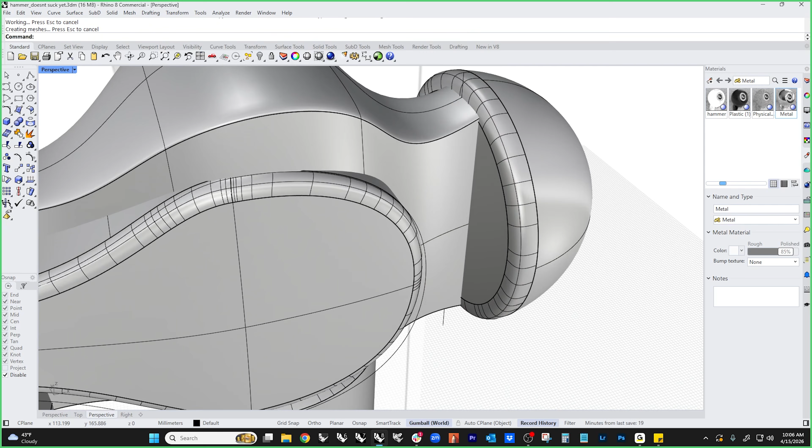So let's do something like that and something like that. Probably want my blend on this. And then we can see how all of the rest of this stuff relates.

Now we might want a better blend here, if we do, right, because this corner is kind of sharp. So we can do one of two things. We can either redo the blend, or we can just come in here and split by isocurve and make a new gap.

Hit T for toggle to change the direction. Now we've got a gap. Now we've got blend surface, different shape. Let's do the same thing down here.

Split, I'm using my hotkeys, sorry, you guys got to yell at me for that. Split by surface isocurve. This is the finest in eyeballing technology as far as how far is that? I don't know, does it look good? To which all my engineers go, oh, idiot.

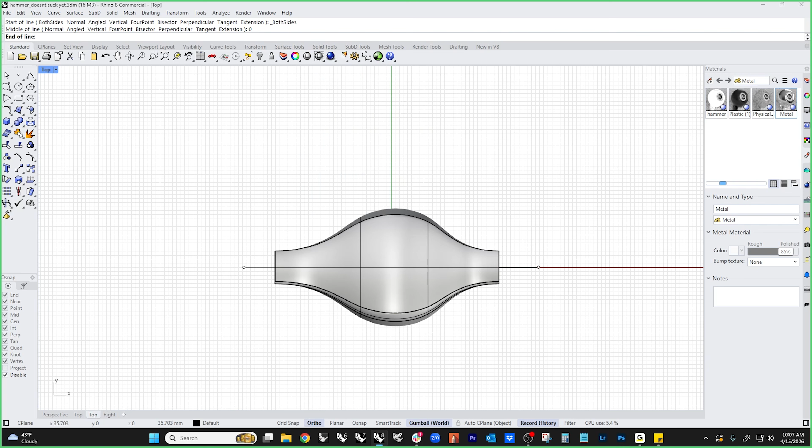Can't be bothered with things like measurement. I'm an artist.

All right, so better relationship to that. So let's just smash this all together and figure out what we've got. So in this case, if I take these guys and I Boolean, it does the exact opposite of what we want it to do.

Why is that? That is because one of these is flipped inside out. This is a closed object, that's a closed object, so we know the normals are pointing out by default. That's an open object, so logic would say this is where the normals are backwards, and we can check it with the dir command, direction, and we just flip them. So now that they're pointing out, when we do a Boolean, it does what we expect it to do.

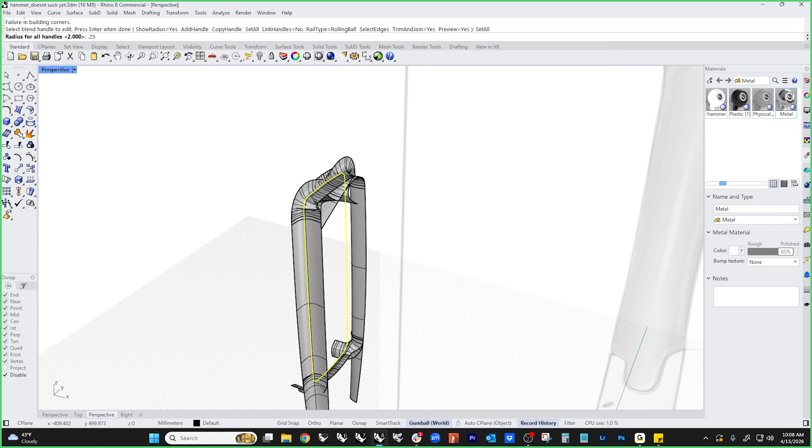So now, for the blending on this, we might be able to get away with a blend. Might be able to get away with a bigger one. And I'm all for it. If you can get away with using the button clicky tools, go for it. That's great.

If not, then we're going to go back to our pipe trim, and we're going to run a pipe around there. We're going to trim a gap, and then we're going to run a blend. I think I'm just going to sneak up on this and see how big we can get before it starts wetting its pants, because I want this to be fairly generous.

But okay, so looks like about 1 is about as far as we're going to get. That's fine, I'll buy that. And for what it's worth, I'm actually using the right click on this, which is blend and not fillet. So this is a continuity-based thing, not a ball fillet, and I like how those look better. So we'll call that good.

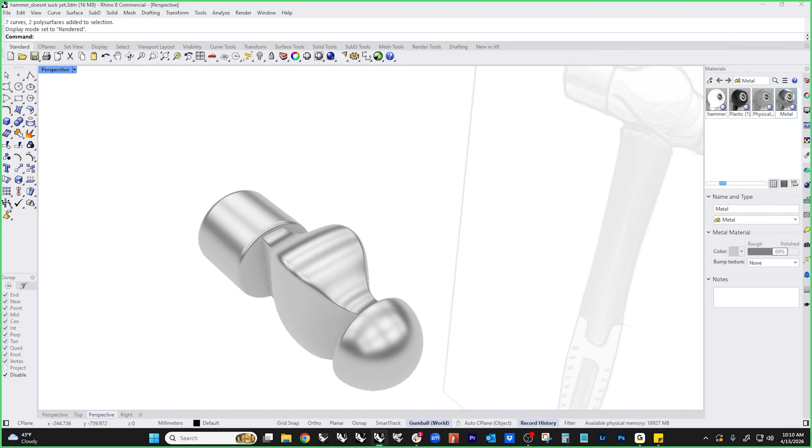Let's see how that looks. I'm going to make this slightly less polished so we can see it a little better, and make this a little darker. So that's coming together, I'm okay with that. I don't think the blacksmiths will chase me out of town for asking for that.

So then the last thing we're going to do is we'll just Boolean this together. And again, it flipped inside out, which means this is the open one, so it's probably backwards, and it is. So we're just going to flip it.

And then we just need to fillet this edge through here. Now this one might be a complicated one, let's see what happens. Why did you flip it? Let's go backwards, because...

This, with the normals pointing in, look what happens when I Boolean it. Bloop, it does the exact opposite of what I want. So if it doesn't do what you want — I want this and this to combine into a chunk — if it does the backwards thing, that means something's inside out, and you use the dir command to figure it out. In this case, the normals on this piece were pointing inside. So now we Boolean this.

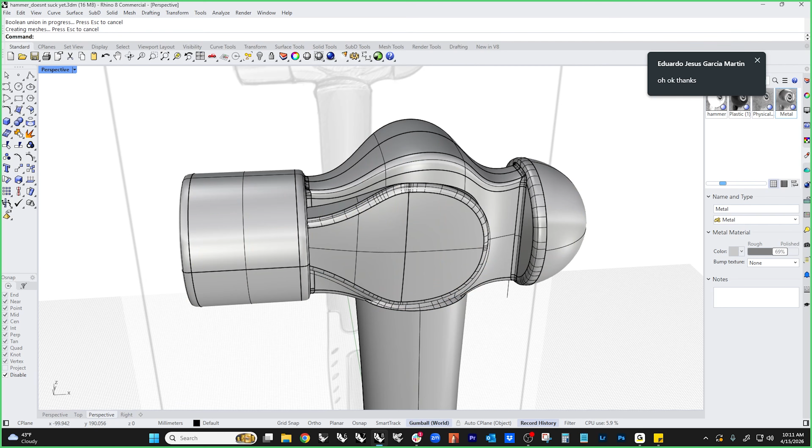Okay, so last thing we're going to do, try and run a blend around this. Now this may fail because it doesn't have enough space to do that. So let's sneak up on it, .5. And I tend to, if this stuff doesn't do what I want it to do really, really quickly, I tend to then say bail out of that.

And then I pick this, I duplicate a curve out of this, I join that curve, and I make a pipe out of it, because now I can determine exactly how big I want this to be. And if it self-intersects in the corner, so be it, because what I'm going to do is I'm actually going to come in here and fix this object wherever it's self-intersecting.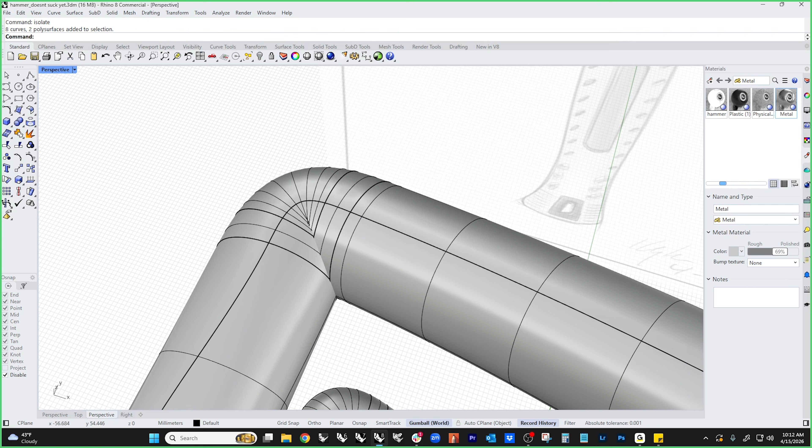So in this case, that corner is pretty close. That one's not even close. Everything else is fine, but this is where the fillet's failing, and you can see why it's failing — there's not enough room in here for this to do its thing.

So all we're going to do is just explode this entire thing. We'll delete this corner. We're going to split by isosurface, or split by isocurve, and I'm going to make a gap that's bigger, and then I'm going to blend surf. Shh, don't tell them I'm using my hotkeys again.

And we're going to make a blend that now is clean in that corner, and that problem goes away. So let's get rid of all this. We're going to split by isocurve.

This is like the world's oldest modeling trick. This is something I learned back from an old video series called Form versus Shape, and I religiously went through those tutorials. This was the first time I saw this pipe trim trick, and I was just like, oh my god, that's brilliant. So I have stolen it as my own.

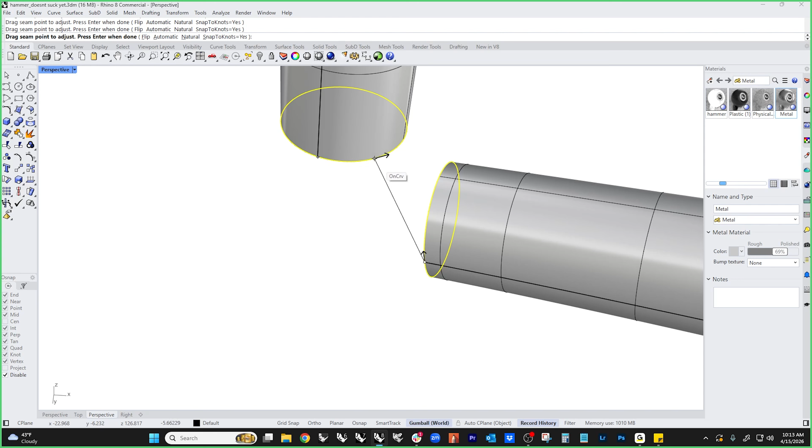By the way, the blend surf, pay attention to what's going on here. Pay attention to where the start and ends are. If I start this here and here, there is also a direction. Make sure that the arrows are going in the right direction. They have to point in the same direction, otherwise that thing is going to fail.

So that works now. This one is close. I'm just going to delete it and redo it. It could be better. Let's see how the start and ends are all crazy. We don't want that, so let's have the start be here, let's have the end be there, and then we change the direction. So now that corner is okay.

And that one is self-intersecting a little bit also, so let's fix that. Again, pay attention to where the start and ends are. And the direction.

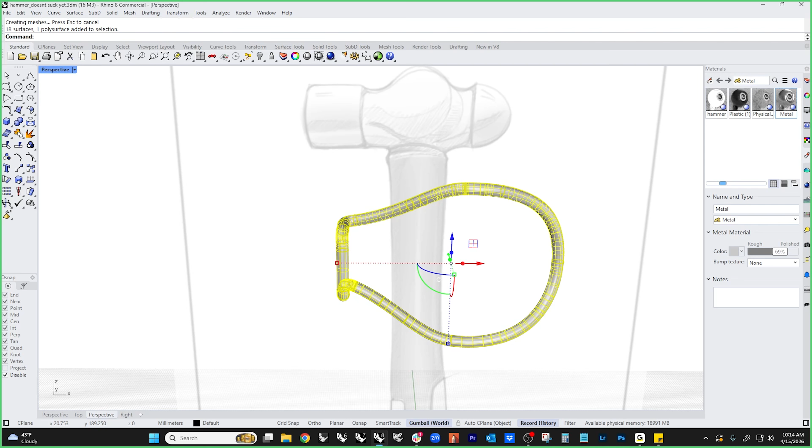So now that our cutting object works, it should be a closed poly surface, and it is right there. Now we can take this and we can use this to trim this object, and we're going to model a gap.

Sometimes we model surfaces, sometimes we model holes. In this case, we wanted to model a hole, and we wanted the hole to be modeled in a very specific way. Because now that it's modeled in a very specific way, we can fill it with blend surf, and it's going to work.

Now all we have to do is just add a few shapes to kind of help it find its way along the way.

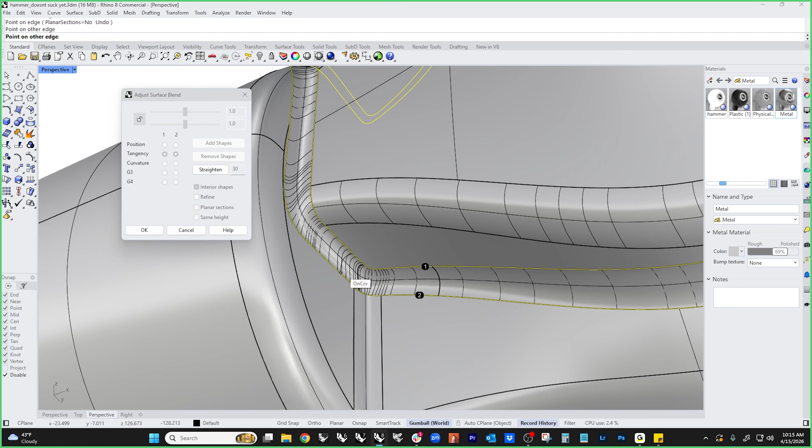I'll show you a model that I cut my teeth on when I was learning how to do this. It was one of my early projects—if you don't know, I was a contract modeler for Mattel for 17 years, and I worked almost exclusively on Hot Wheels. I built about 400 different Hot Wheels cars over the time that I was working with those guys.

And one of the ones that I built was this one called a Flying Fortress, an old B-17 bomber. It was surface upon surface upon surface, blended, blended, blended, blended. I'll show you that model real quick if we've got time at the end of this. But this is where I kind of perfected this technique for myself.

So now it's saying it's an open poly surface, so let's figure out where right there is the problem. So let's extract that, and let's just split the bad stuff out.

Nobody has time for that negativity. Join that up, and we'll just do whatever. Doesn't matter. Whatever kind of surface we want to throw in there. Do a 2-rail sweep. It's fine.

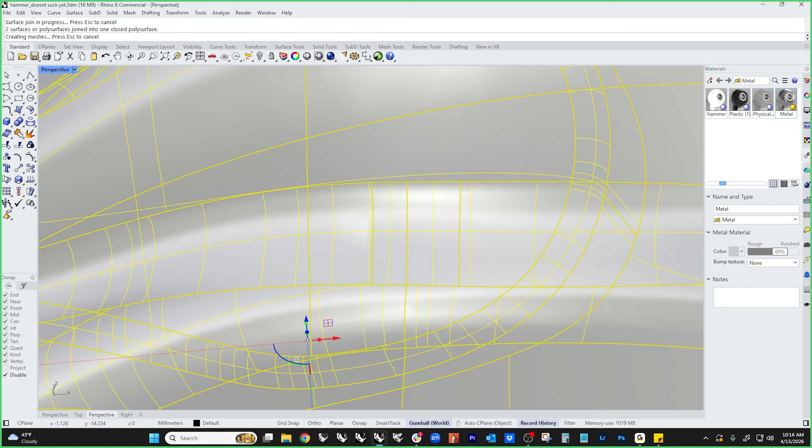Now that's closed. So let's just mirror that. We're going to split this in half. And nope, stop doing that. Mirror this. And that gives us that kind of shape.

And now that I'm looking at this, the ball peen doesn't go in flat here. It actually blends into that. So let's do this.

Model a gap. And then we'll blend. Chain there, chain there. Let's pick a center line spot to start from. And on this side, it's pretty tight, like that.

And you can do that all day, right? You can just trim a hole, model a gap, trim a hole, model a gap, trim a hole, model a gap. Now, the top of this pokes all the way through.

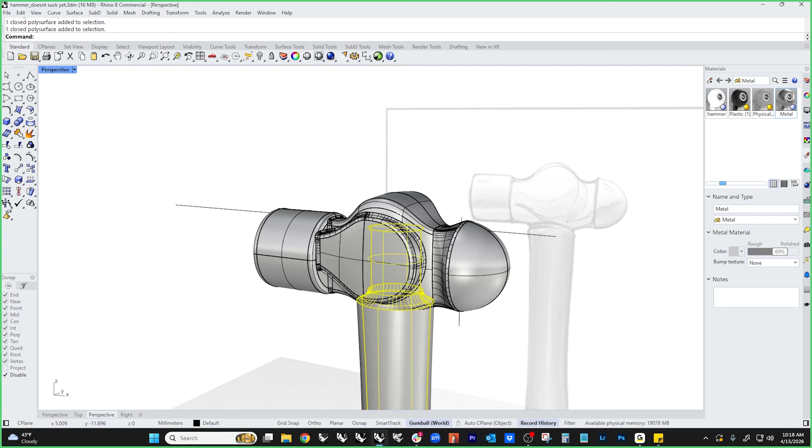So let's just bring that up a little bit. And I think I want that to be a little rounder. So let's—say it with me, kids—model a gap.

I was teaching a live class once, and somebody turned this into a drinking game. Every time I said 'model a gap,' they were like, mm.

All right, and then that actually has a little shape cut out of it, so I'm going to use this as a cutting object.

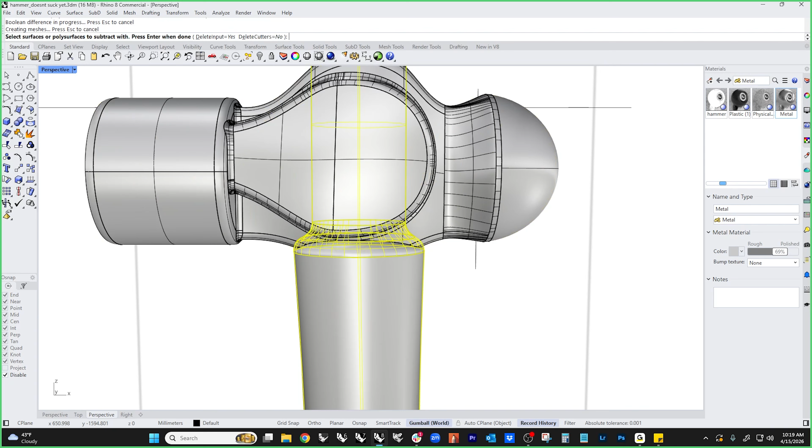And then this actually has a little blend on that thing, so I'm going to do a pipe trim on that, because I'm not even going to bother trying to figure out what that curve is, or try to turn it into a fillet. So that all completes okay.

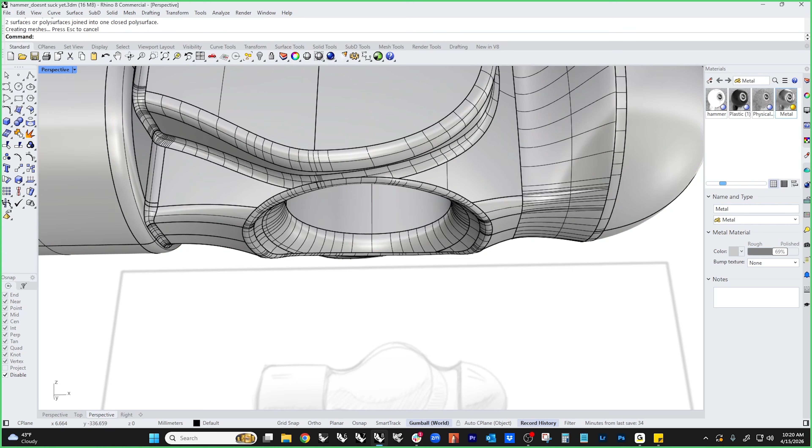Doing this in wireframe is kind of the easiest way to do it. Chain this. Done. Really easy technique, it actually works remarkably well.

And there is a little bit pushed in, but it's kind of like that. One thing about the gumball cutter, it cuts through everything in the scene, so only use it for stuff you're actually going to cut. And then the last piece of the puzzle is just right here, and I think we're going to get away with a little bit bigger one.

It's not procrastination, I'm just waiting for panic to focus my efforts.

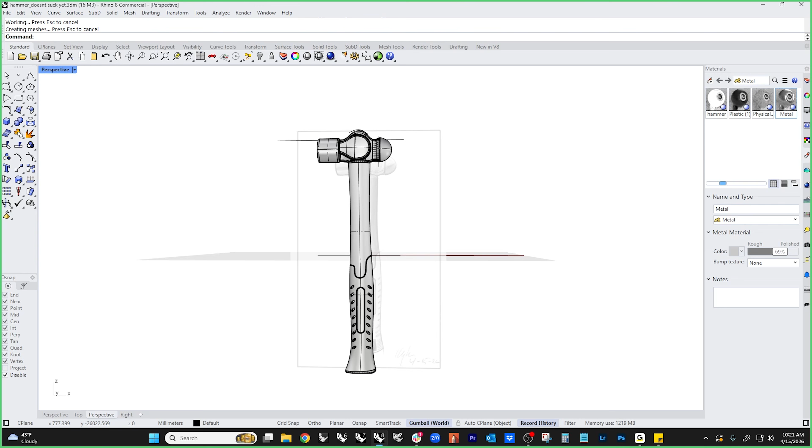Hey, how did I select only a single object for the cutter? There's an isolate command, so I've got a couple of objects here. If I only want one of them, I pick it and type isolate, and that object is now the only thing in the scene. And then if I type show, it brings everything back. So that actually worked out all right.

Let's take a look at this, I'm feeling pretty redeemed from my last hammer disaster.

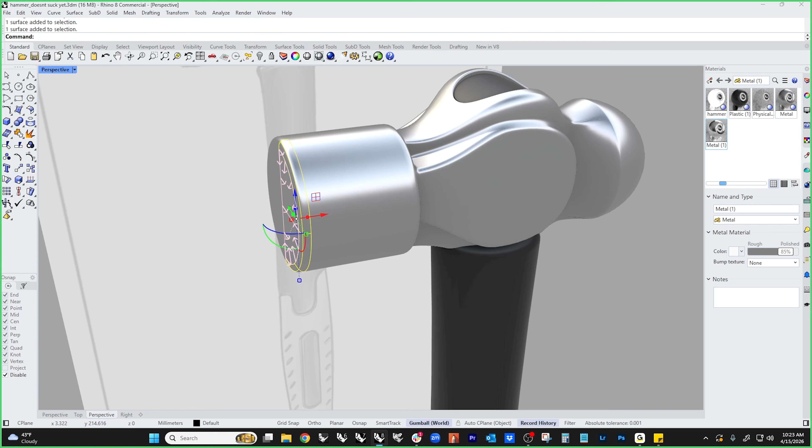So that gives us a little better version of that. If we wanted to get really crazy, we could make a different metal, and we could sub-object assign by shift-control clicking those faces, so now we've got two different finishes going on there.

So if we make this one a little darker, we can see that it's got its shapes in there. We've got our speckles on our handle.

So let's hide our image. What time is it? 10:23. Let's hide our image, and let's...

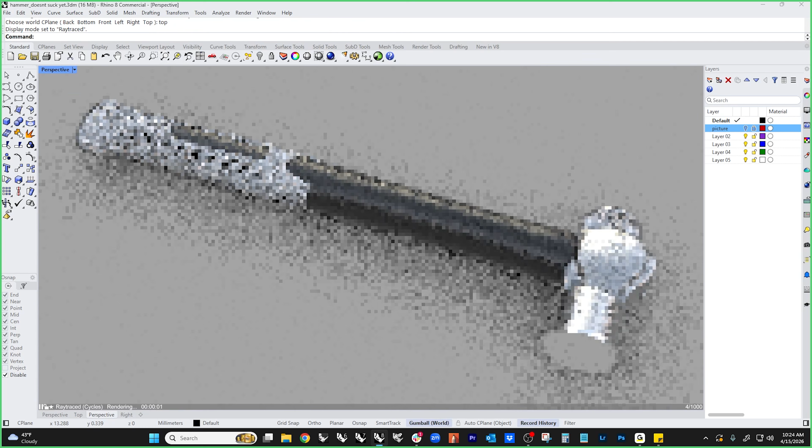Let's just see what an out-of-the-box ray trace looks like on this. Woo, that's spicy! Let's knock that down a little.

Shows everybody how to override the default, and then ends up going back to the default.

Actually, let's change that to a different material, here, this will be fun. Let's go back to plastic, change that to speckle, and let's make this extra small. Yeah, I'm okay with that.

Maybe looking at it this way is a little better. And then let's change the camera from 50 to 35, I just like it, it gives it a little bit more perspective and a little bit more drama. And for an out-of-the-box, drag and drop, default environment, no effort rendering, I'm going to call that pretty good.

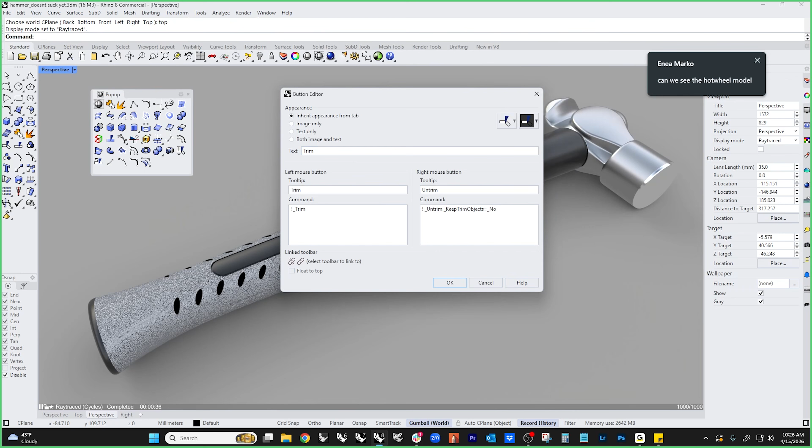Oh, can we see the Hot Wheels model? Yes, absolutely, so that's finished, let's call that done. And then I'm going to just export this image so I don't have to do it later. Capture viewport to file, this one.

It's funny because, first of all, thank you, I appreciate that. Second of all, there are some techniques in here that took me a really, really long time to figure out on my own, and no one showed them to me. I'm almost completely self-taught with Rhino, and I learned everything by forums and bugging Pascal and JB and all the guys that used to work here before I did. So having a video like this is kind of my gift back for everything that Rhino has given me over the years, because I didn't have this stuff. And so I hope I can save you a lot of years of fumbling. So all right, so let's take a look at...

This is spinning, why are you spinning?